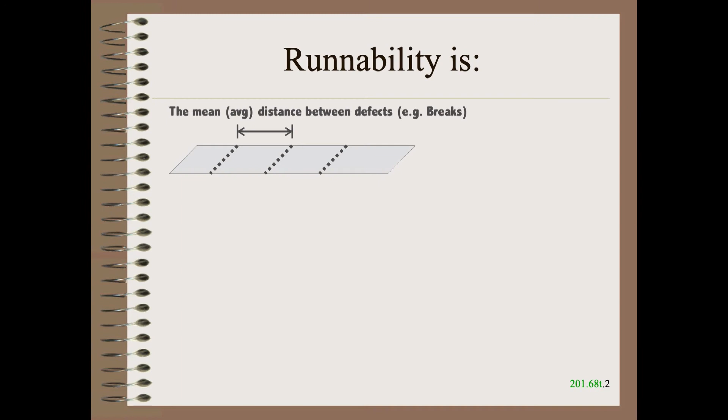We begin our careful definition of runnability as the mean or average distance between troubles, such as web breaks, jams, defects, and so on. The average distance can be quantified in any suitable length units, such as million feet, 100 rolls, and so on. In the paper industry, where much of the study of runnability began, the common units are breaks per 100 shipping rolls.

However, we must tighten the definition because some materials run better than others. Newspaper and tissue, for example, break more often than steel, even though steel also breaks. Even with nominally identical materials such as newspaper, runnability can vary by an order of magnitude or more between two rolls from different suppliers.

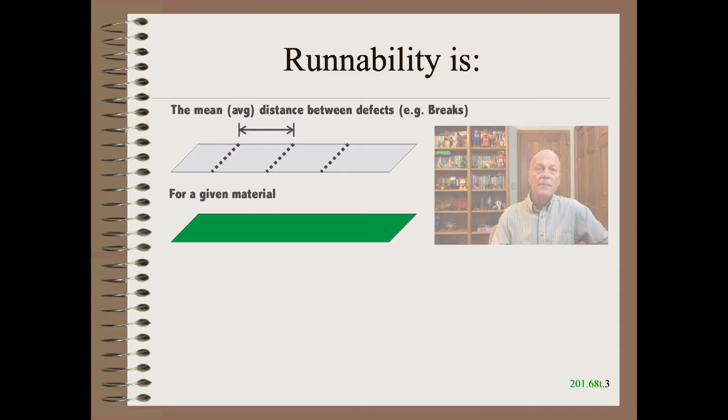We must further tighten the definition because some sections of a machine run worse than others. We now have the elements of a material-machine system, rather than a black and white 'is it the material or is it our customer's machine' silly question.

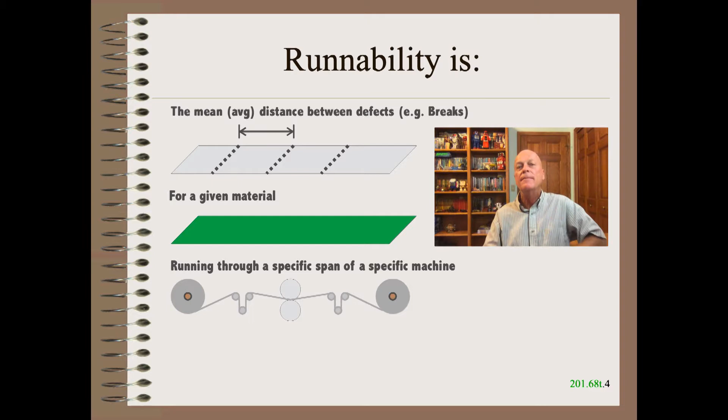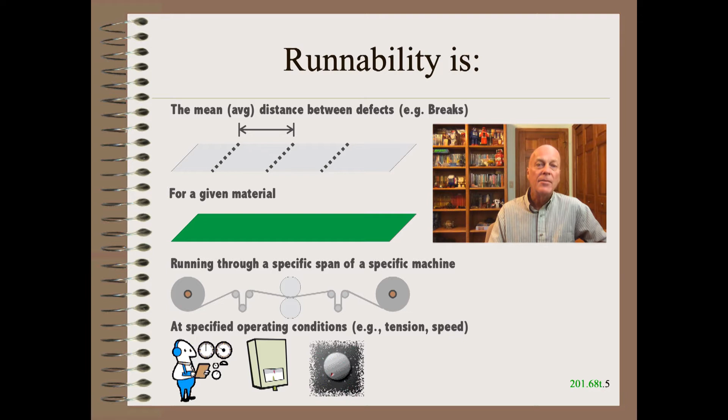Finally, we must tighten the definition yet again to include important operating conditions such as tension and speed. Thus we now have the elements of the full man-machine-material system, as described in my two-day problem-solving course.

Some materials run better than others. However, because defects are usually statistically rare, it may take thousands of rolls to tell whether one material or one machine condition is actually better than another.

Further complications include environmental or seasonal effects at both the producing location and at the customer. For example, newsprint printing presses have twice as many web breaks in the dry winter months as in the summer months.

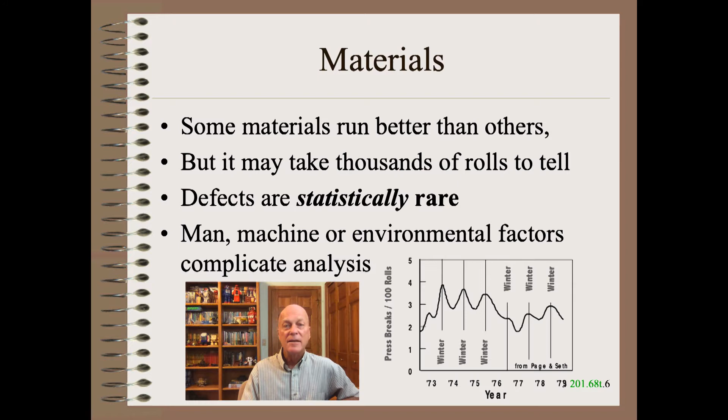When we troubleshoot runnability, we must look at the span level rather than the machine level. For example, we might find many web breaks occurring near a process, suggesting the process is rough on the web, perhaps avoidably so. On the other hand, we might find that many web breaks occur just after the unwind, indicating that maybe the unwind is troubled, or maybe the web is so troubled that it gives up at the very first opportunity.

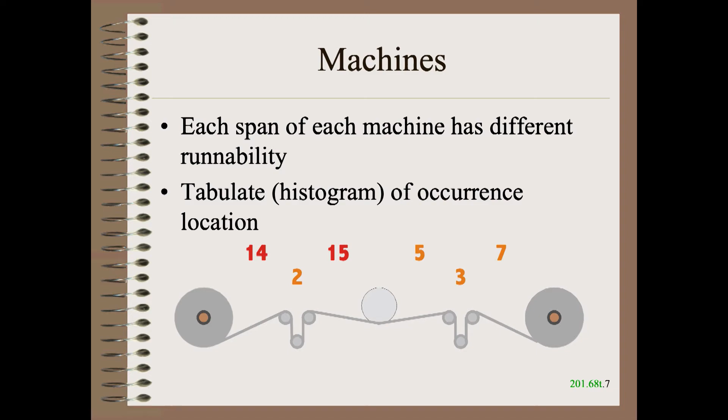Once we know where we're having the most trouble, we can then focus a camera or other instruments. For web breaks, we can use either high shutter speeds or high frame rate cameras. Both require extremely good lighting.

Even more information might be found at the break initiation point, which occurred somewhere along the crack. Make every effort to find both ends of the tail, and make every effort to document the material and process details while they are still fresh.

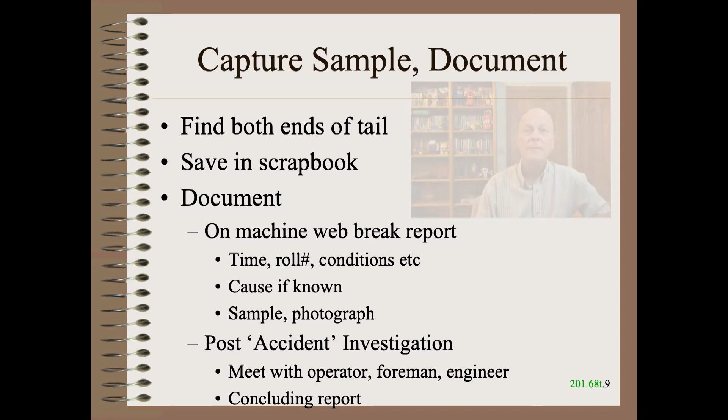In newsprint, for example, most breaks start at a shive. However, almost all begin at some point of contamination. The contamination can be water, oil, or something else, or even the material itself, such as in the case of paper shives and film gels.

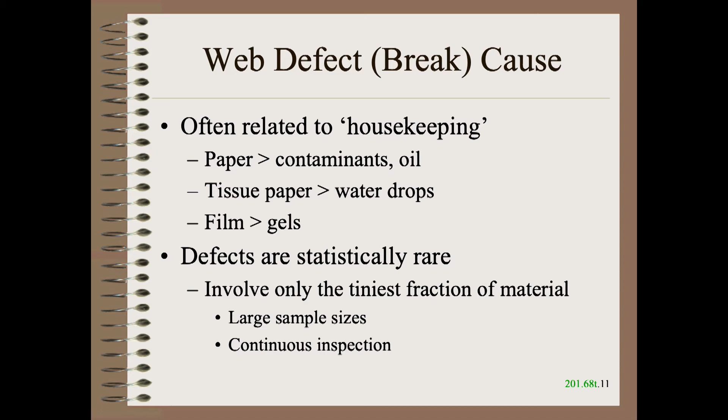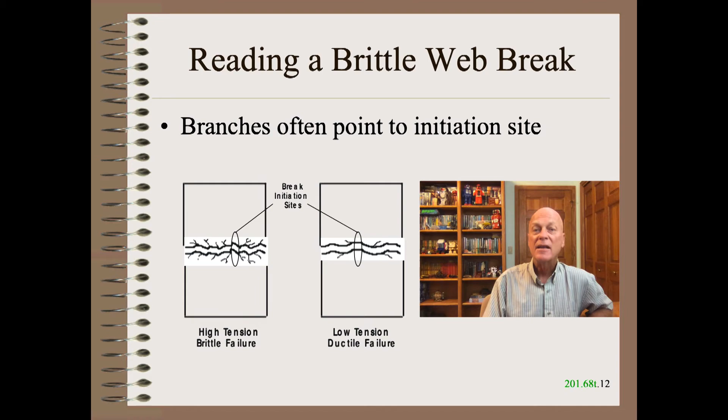I teach how to read a web break in one of the optional modules of my award-winning and trademarked Web 101 class, which has been taken by 5,000 people.

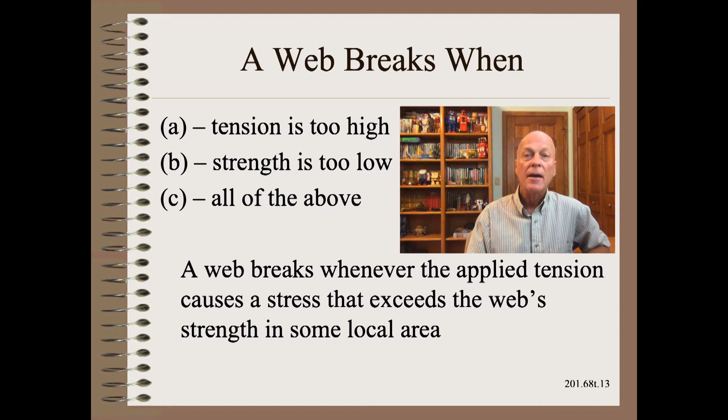Have you ever thought about the when, where, and why of your breaks and other runnability issues? Web breaks are almost always complex system issues. They include applied tension and web strength.

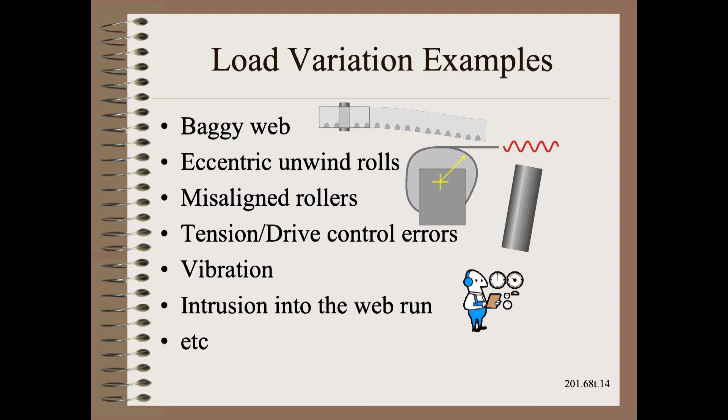Just as with load, local web strength can vary by an order of magnitude between one location and a nearby location. So web breaks, as well as other runnability issues, are more defined by variation than they are by averages. The average web simply does not break. Average web strengths, such as reported by a test lab, may be worse than worthless. They may be misleading.

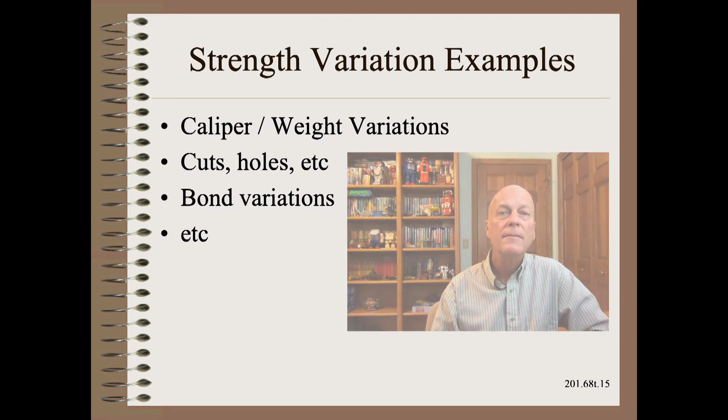Here is an example of a very strong material that runs quite poorly because it is also variable. I worked on just such a system on a brand new winder in Canada, where the mill manager had difficulty believing that variability could wash out all of the benefits of an otherwise strong web.

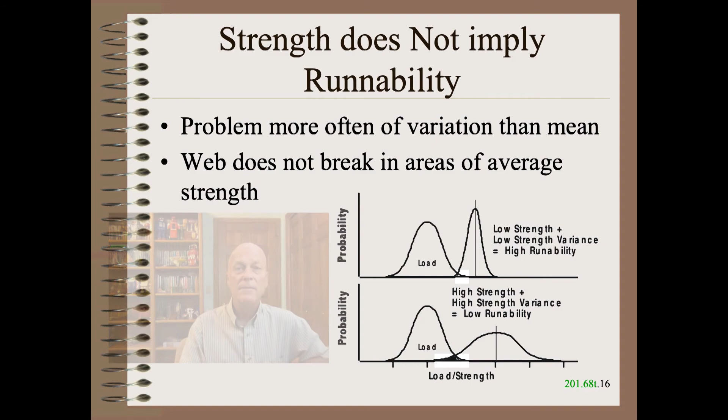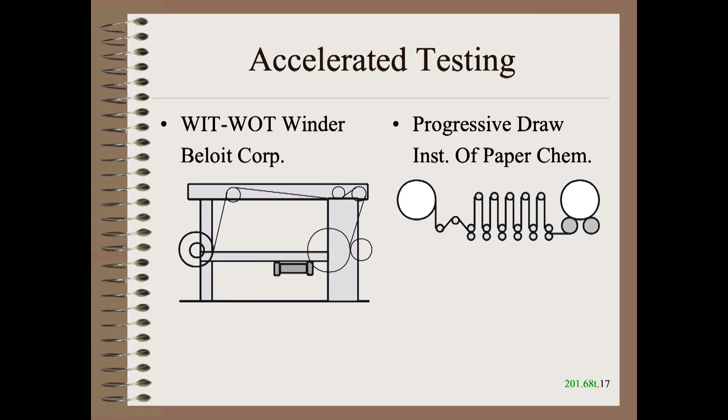I, as well as many people before and some after, have studied runnability as a property of a material that can be measured using specially configured lab machines.

What we found is that web breaks increase with the second or third power of tension—not only average tension, but local tension caused by poor web machine mechanicals and poor web machine controls. For example, the web break rate may be 1,000 times greater during a speed ramp than during steady state.

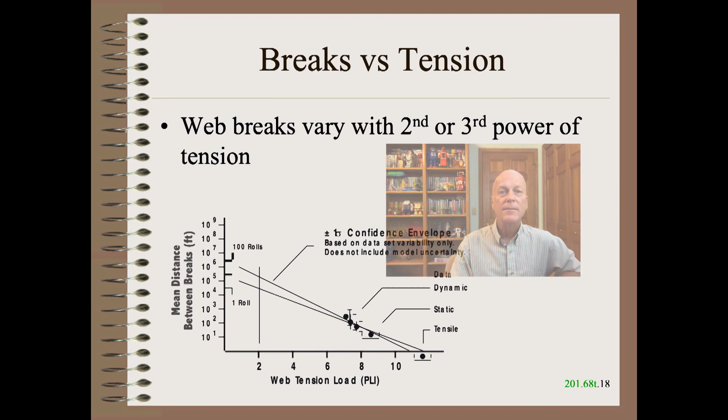Also important in web breaks are stress concentrations and fracture mechanics in the case of brittle materials. Flaws that are big are worse than when they are small—that is obvious. Flaws that are near an edge are twice as serious as those that are in the middle. Finally, flaws that have a sharp radius, such as a crack, are 1,000 times worse than a smooth hole, everything else being equal. These principles are not just true of paper.

In the metals industry, they mark splices with three holes. The combination of the holes, the stress concentrations of the holes, and the proximity to the splice increase the web break rate at a splice a million-fold. This shows a lack of awareness in the metals industry, a total lack of common sense, and a paralyzing slavery to status quo in machine design.

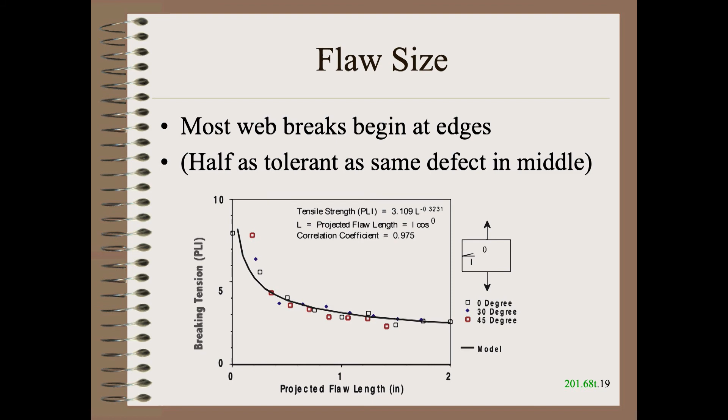If you want a good overview with a great selected bibliography, you could do no better than my classic 1990 article in the Tappi Journal.